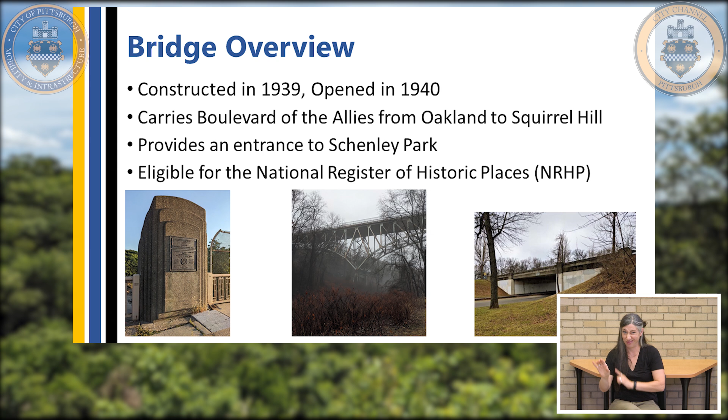One other thing - we're primarily here talking about the Charles Anderson Bridge, but it's important that we don't lose sight of the fact that there's a second bridge just upstream in Schenley Park, the little Panther Hollow overpass. That structure is also going to see serious reconstruction effort over the next couple of years.

So we wanted to start out by circling back on some aspects of the project timeline. Like I said, the original project started up in 2019. I think it's been on the city's mind for much longer than that, but the actual design and engineering project started then.

As the details on the rehabilitation project were starting to come together, the anticipated start of construction was not going to be until 2026.

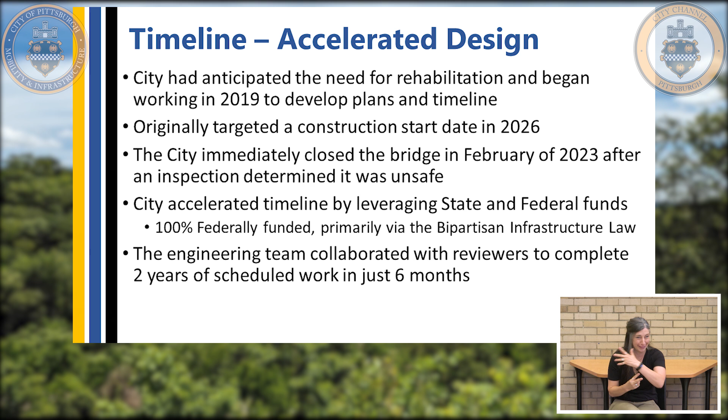In 2022, the city started taking a much closer look at some of these outstanding older bridges, and through some close analysis, inspectors notified us that we needed to close the bridge in February of 2023.

That came as a surprise to a lot of people, and we know it's been a huge inconvenience to the neighborhoods and to commuters in the region. The bridge saw approximately 21,000 vehicles per day crossing it.

So after the closure, the first thing we did was evaluate the options to get this reopened to traffic, and how to do that both using taxpayer dollars most effectively and also minimizing the amount of disruption.

It's been 15 months since we first closed. I think from an outsider's perspective, it might not feel like there's been a lot of progress in getting the bridge reopened. Part of why we're here tonight is to show the enormous amount of effort that has gone into getting this project off the ground, accelerating the design effort, getting into construction, and securing funding for construction.

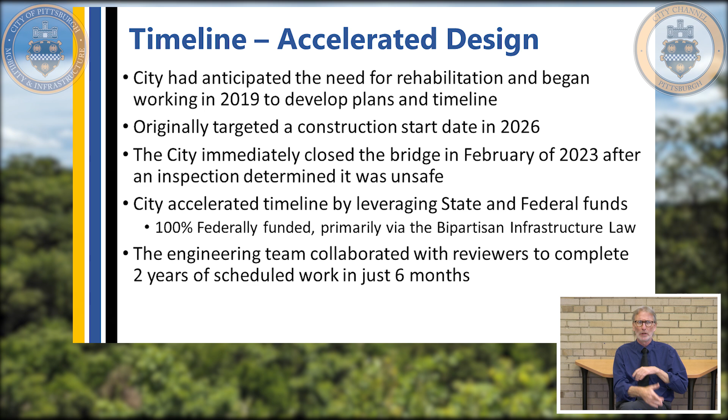Just a quick background. As I've said a few times now, the project started in 2019. We did have some outreach in 2019 with stakeholders, residents, and consulting party meetings to discuss some of the historic elements of the bridge. We've come to you guys with some of the findings from preliminary engineering, and from our final design. I'm going to go back through some of that today, and where we are today: the pre-construction public meeting. Again, thank you for your continued interest in this project.

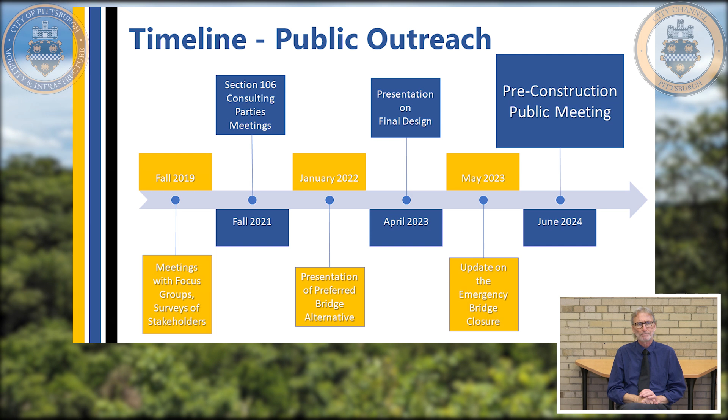A quick overview of the big picture items, focusing around the Charles Anderson Bridge, but that's not all that's happening here. The full deck, driving surface and sidewalks of the bridge will be completely removed and replaced. The ornamental historic railings will be taken off-site, refurbished and reinstalled. The entire truss, the bulk of the structure you see, will be repaired, strengthened, and fully repainted. The concrete substructure, several piers and abutments, will also be repaired.

The project continues east, where we're rebuilding the overpass on Panther Hollow Road. We are incorporating a cycle track that will extend from Dawson Street to the tie-in in front of Phipps, along with new upgrades to the signalized intersection at Dawson Street.

The way that's going to be accomplished: as the bridge looks today, we have 2 lanes eastbound, 2 lanes westbound. Based on traffic analysis, the westbound traffic volumes did not warrant 2 dedicated lanes of traffic, so that will be replaced with the cycle track, which will extend deeper into Schenley Park in the years to come.

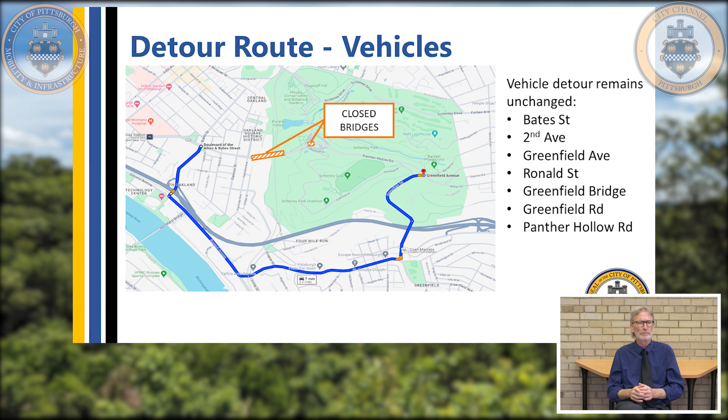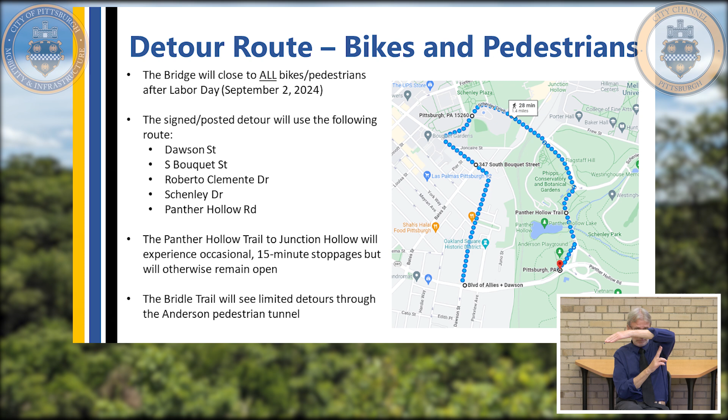The pedestrian detour: as I mentioned, the bridge will be getting an entirely new deck, and because of the way the deck and steel support system will be installed, as well as repairs and strengthening of the truss itself, the entire deck and both sidewalks will be taken off the structure. So we can't provide pedestrian access over the bridge once the project gets moving in earnest.

We know it's been a pretty relaxing entry point into the park over the last year. Unfortunately, the reality is we'll have to deal with the alternative closest path, which takes you on routes up into Pitt's campus. Starting from the west and heading east, you'd use Dawson Street, Bouquet, Roberto Clemente, Schenley Drive, over to Panther Hollow Road.

While that is especially inconvenient, we'd like to emphasize that the trail beneath the bridge, the Panther Hollow Trail or the Junction Hollow Trail, will remain open. There will be occasional stoppages while the contractor is moving equipment or working directly overhead, but it will remain open through the construction of the bridge.

There is also the bridle trail, which is squeezed under the east abutment of the bridge. That will see occasional detours, but it's just a quick shortcut over to the underpass that connects to the Schenley Park pool.

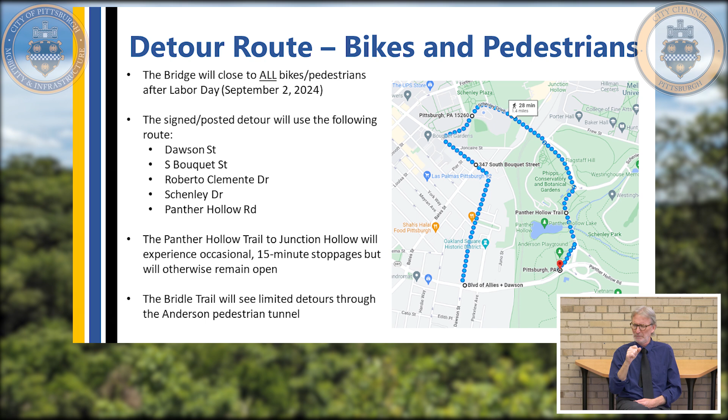Worth mentioning that amenities in Schenley Park, while they may be less convenient to access, will not be directly impacted by construction. So both the pool and the playground will not be impacted directly by construction.

So where do we stand today? Well, we've got about 2.5 years of construction ahead of us.

The contractor and subcontractors have been working on submittals and designs and permits, getting steel fabricated off-site, working on their means and methods for some of the early repairs as well as what comes next, preparing equipment.

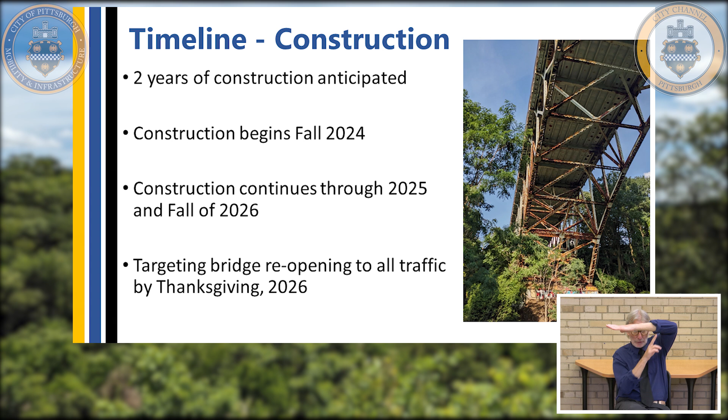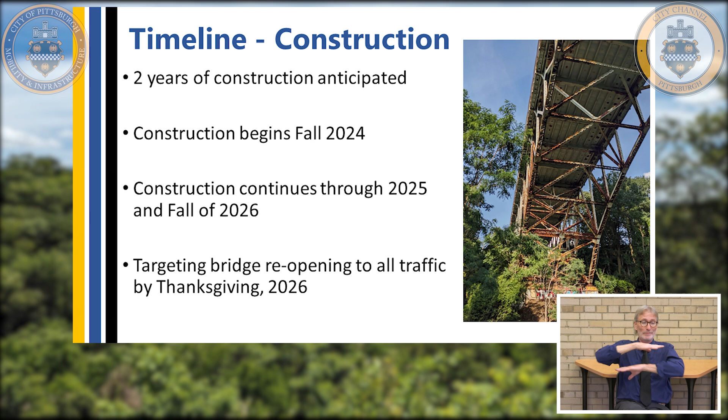Although, as we move into the actual bridge repair process, we have to plan, we have to prepare for closing the deck to all pedestrians, and at the moment that's anticipated for after the Labor Day holiday.

So construction will continue into 2025, into 2026, and we have a milestone date to open up to vehicle traffic by Thanksgiving of 2026.

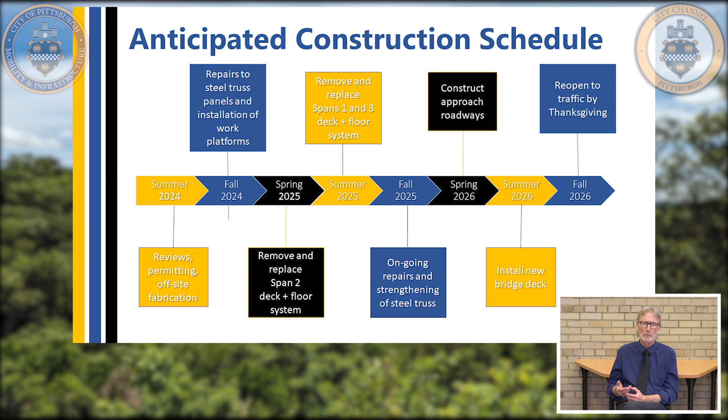And just wanted to reiterate that it takes a city to do these kinds of projects. There's an enormous amount of support within the city itself, across the departments, as well as at the state level. This project really became everybody's focus in 2023, and I think there is an enormous amount of effort put in to getting that design package out the door. So really thank the design team for the effort that they put in. It's a lot of sleepless nights.

And just like to point out that our construction team, we've got about 20 different folks here who are going to make this project a reality. So with that, we're going to open it up to questions. I just wanted to say thank you again for your patience as we get started and for coming out tonight.

So I'll kind of moderate questions. I don't know how many people we've got on Zoom, but a number of people there. So we'll just kind of alternate questions between in the room and Zoom, unless there stop being questions on Zoom or the room, and we'll just stick with that. So you got a question here?

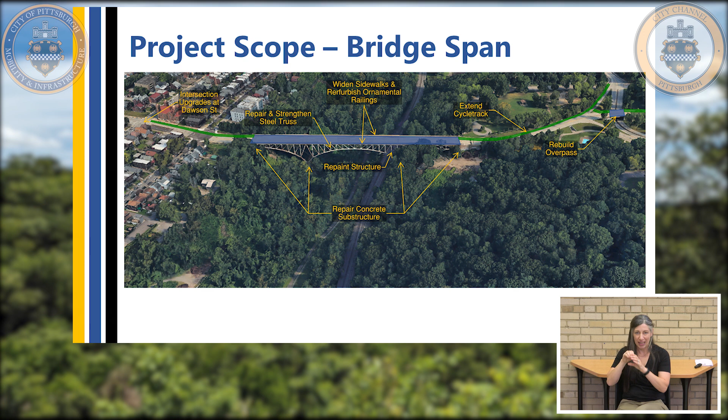This bridge will see closures during 2025, but the plan is that vehicles can detour within the cloverleaf, so there should be no major disruption to the flow of traffic as it is today.

Linda on Zoom wants an update on the condition of the Swinburne Bridge, because it's seen a lot of use since the closure of the Anderson Bridge.

The Swinburne Bridge, we still have a project in motion to replace that structure. There were concerns earlier on about the timing of these projects. That one will not go to construction before Charles Anderson reopens to vehicles. We keep a close eye on it, inspecting it every 6 months, and we've done a number of repairs in the last couple of years. So at this time, we're still advancing through the design work for a replacement structure, but that won't happen until after Charles Anderson reopens.

So westbound across the bridge at the Parkview entrance, right now it's 2 lanes, and you can sit in the left-hand lane trying to cross traffic, especially at rush hour coming back. Do we hope to have a holding lane there, or a spot, or a light to allow traffic to cross the double lanes as they're coming up? And can you also fix the no-turn-on-red at Dawson to be a morning thing versus an afternoon? It's reversed right now — you can turn after 4, which is rush hour, which should really be flipped. Coming from Dawson, taking a right onto the bridge, it says no turn on red up to 4.

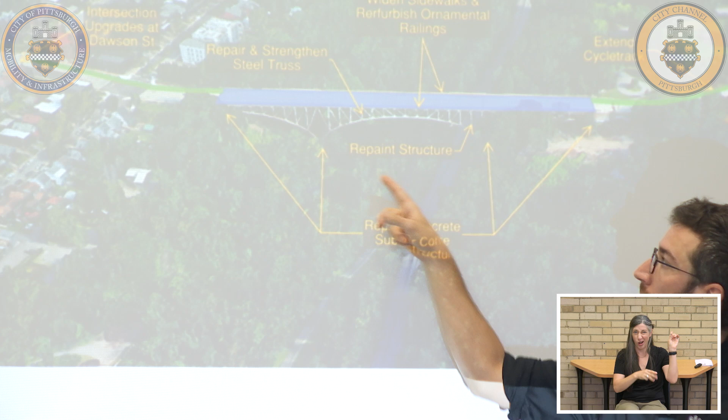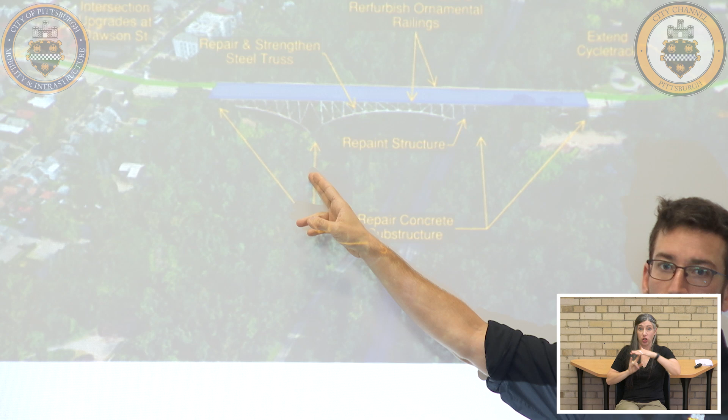Can you point it out, Zach? Yeah, we're up to where you're just clearing those trees, still under the bridge on the hillside, but just to get up to the pier - from the trail to Parkview. They're working in the direction of Parkview, but not cutting trails up to Parkview. Right.

And these are all great questions. I just want to be mindful of other people's questions. So does anybody else have a question? We'll go to Zoom and then back to the room, and then we'll come back to you.

Can you tell us what the current anticipated schedule for the Fraser Steps construction might be? The project is moving along in design right now, and we have it scheduled to go out to bid, I think around Labor Day. I am hopeful that construction will start in the fall, but it will definitely continue into next year. I think we're getting to the point that we'll probably have better updates that we can share with the community relatively soon. I know we haven't been out in a while for that one, but it is moving along.

Is there a question back here? So will the span of the bridge, including the sidewalks, be the same width as it is now? Are you going to extend the sidewalks further out? And my other question is, was there ever any consideration to making one of the sidewalks for the bikes, the other for pedestrians, and keeping the two westbound lanes? Because in the mornings, in the rush hour, it gets very, very heavy coming into the city.

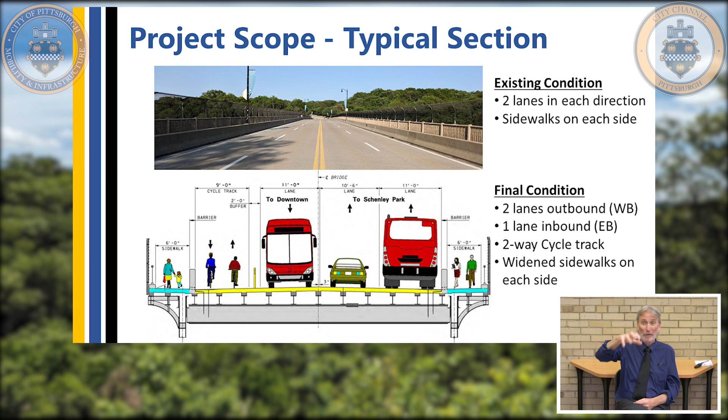No, I mean, could you make one a bike lane and the other one a pedestrian lane, and eliminate the other, and then get two westbound lanes? The question about pushing the facilities to one side or the other—I think because of where the bridge is in proximity to the park and to dense neighborhoods, the amount of student traffic, we felt that, and also there are some structural concerns to pushing the overhangs out. So to prudently provide that capacity, as we've said a few times, we've maximized the width that we can get out of the structure. That's why we're looking to reuse existing space, mindful of how the neighborhoods are evolving, how the park is changing, how people are getting to and from campus, and trying to provide space to do that safely in the future in a way that doesn't necessarily require an automobile.

So, yeah, the total doesn't work. The sidewalk's only, what, 6 foot? You need 11 foot. So even if you took one away, the total doesn't work for that. I can add just a bit. As Zach was saying, we pushed the sidewalks out a little bit. We mentioned earlier we squeezed an extra 2 feet out of the curb to curb width. We literally squeezed every bit out of this, and I think we even pushed for a little more. This is the old transverse section, so that's not exactly—it's close, but all the numbers aren't going to add up because it's actually a little bit wider than what that is showing.

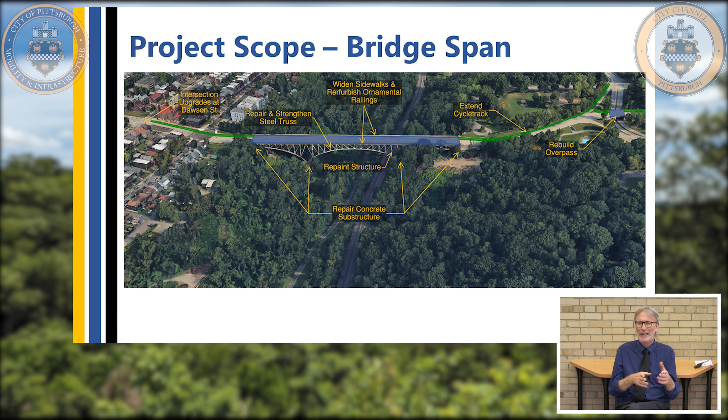So your concerns about safety and traffic related to the playground and pool - if you're crossing from the west on the sidewalk trying to get to the playground, you've got people whipping around you fast. Yeah, it's not our favorite thing. I'll pass these concerns along to our traffic group. We do have the cycle track at the moment - let me find the right slide. The cycle track does show, it projects to the end of the interchange, as we're calling it. DOMI traffic is looking at where this can tie in elsewhere in Schenley Park.

And I'll pass along concerns about safety around the other park amenities, and also connecting the dots with the cycle track too. For sure - if you're coming down Panther Hollow and trying to get into the cycle track on the left side, it's a weird situation. Right, I agree.

Any more questions on Zoom, Laura? So many on Zoom. Okay.

During construction, why are they only working 4-day weeks?

The contractor is still working 40-hour weeks, doing 10-hour days. There's an efficiency gained by packing in as many work hours into a single day, and there are also advantages for procuring materials and deliveries. There will be certain operations, like bridge painting, happening more days of the week and more hours in a week. Typically it's a 40-hour week, but we choose to do 10-hour days, except during the winter time. Some operations will work more than 4 days a week and more than 40 hours a week.

Sounds good, but that's not how it works. I've come close to being hit plenty of times on the Schenley Park Bridge and the Panther Hollow Bridge by cyclists on the sidewalk. One of our goals in providing a dedicated facility for them is to give them a space so they don't ride on the sidewalk.

Okay. Elena on Zoom would like to know who did the traffic study, and whether that's something DOMI does internally or asks a consultant to do.

The traffic study was done in conjunction with the larger bridge rehab design project, done by our lead consultant, Michael Baker, and it informed both the design process and the planning process. Yeah, it was all built in.

I think you're on pretty solid ground traffic-wise. I think we've got to put the project in and see how people adapt to it. Providing the facility will get them off the sidewalk—we've found that in other parts of the city. So I think just move forward, but pay attention. Let's keep our eyes and ears out there and give Norm a call if you see anybody misbehaving. But I think you might be okay on the traffic study.